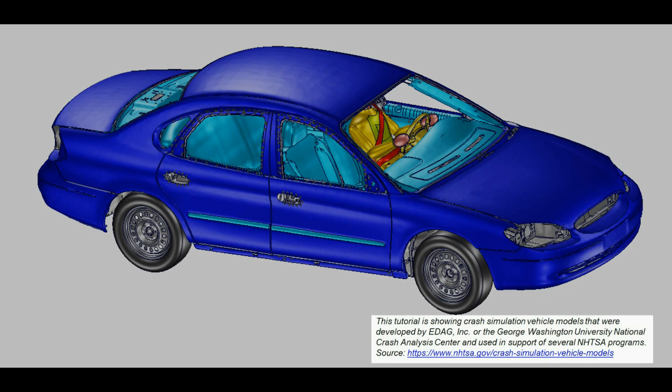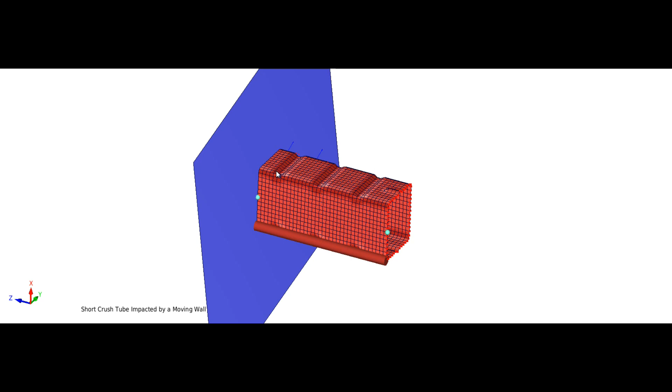This video is an exercise on how to display section force. In this particular example, we have a short crush tube impacted by a moving wall. We will go through the importing of the proper geometry and curve data and display and animate the cross-sectional forces as well as the appropriate curves.

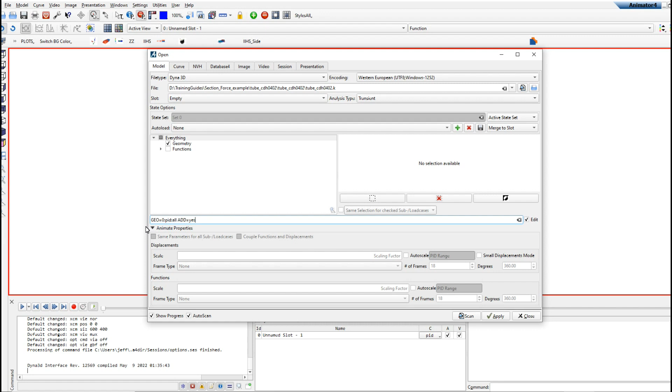First, import the input file, just the geometry, and be sure that this line is set for geometry equals 0, PID all, add equals yes. There's our model. If you go to model and section, you should see the sections that were defined by the engineer.

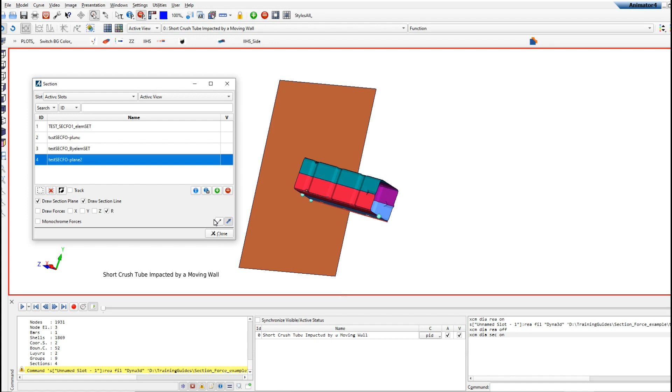Next, import the result file. In this case, it's the D3 plot. Just the displacement since the geometry is already there.

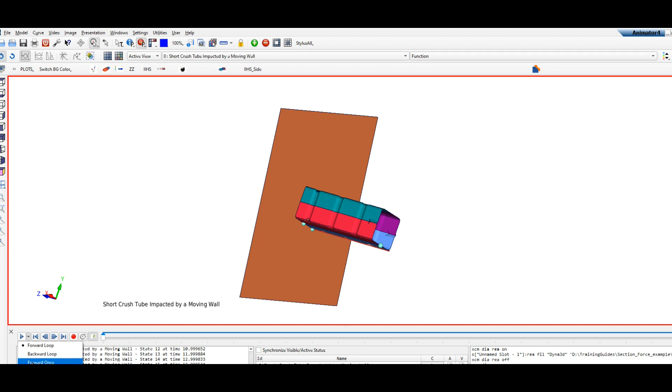Now we'll open the appropriate curve, in this case the bin out file. So file, open, curve, bin out, and we're going to grab the X, Y, Z, and total. You see your engineering curves there, and hit apply. Take note though, in this case I added the curves into a list. If you go to curve and list, here are your curves.

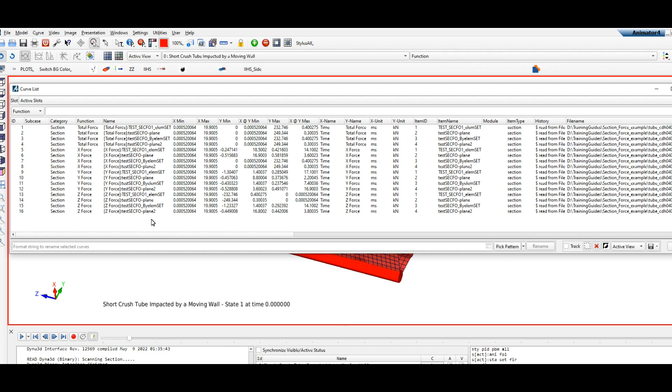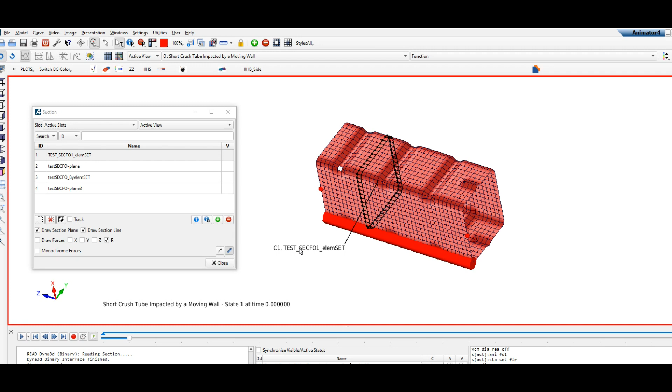We are now going to get a visual display of the section forces. So go to model, section, go ahead and select any one of the sections and hit I. That will display that section. I'm just going to move this text here out of the way a bit, make it a little more clear. And there's your section.

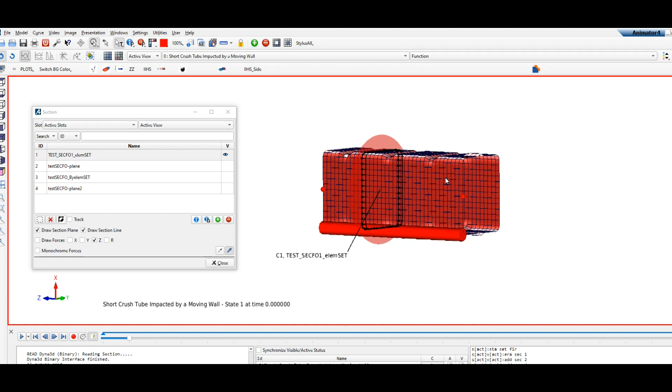Go ahead and we'll display the plane. We'll grab the Z direction and hit the I button, and here's your plane. Again, just to visualize.

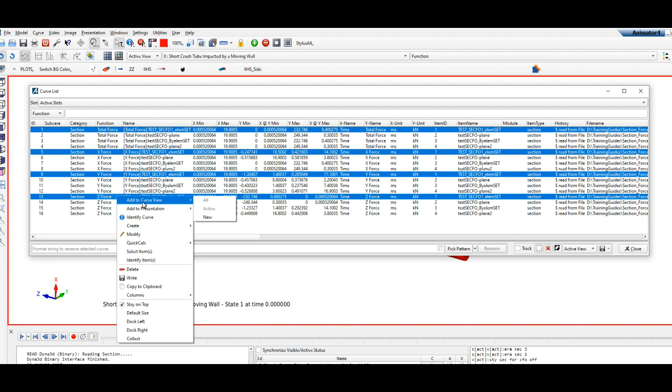Let's go ahead and bring the curves back into action here. So curve, list, and we're going to grab the X, Y, Z, and total. Right click on your mouse to display. In this case, we're going to do it into a new window. I'm going to close this and spare you modifying the curves to make them easier to see.

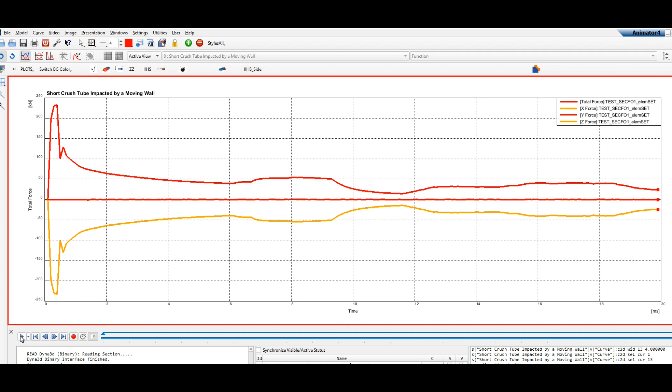Here's our curves. You see that animation. Select tile for tile view, and you've got them both together.